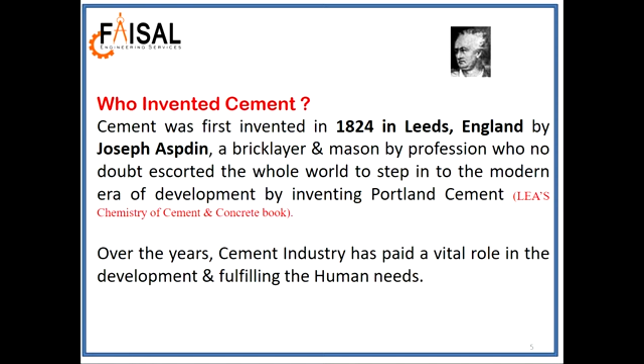This was the first patent certificate which was issued to Joseph Aspdin in 1824.

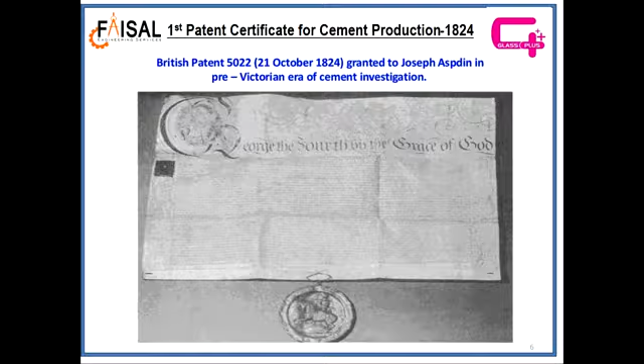Later on, his son William Aspdin developed and constructed this kiln, which is the world's oldest cement kiln. This kiln was operated during the period of 1847 to 1850.

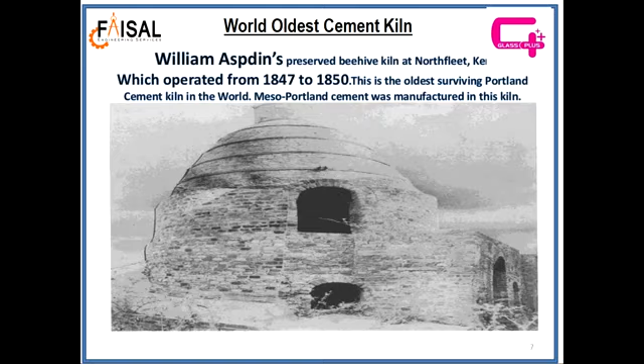Cement brought evolution in human shelter, from tents to concrete homes.

This is the data of yearly cement sales and its growth since 2006 till 2021.

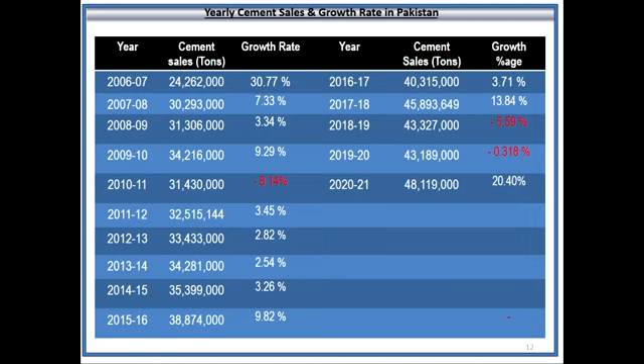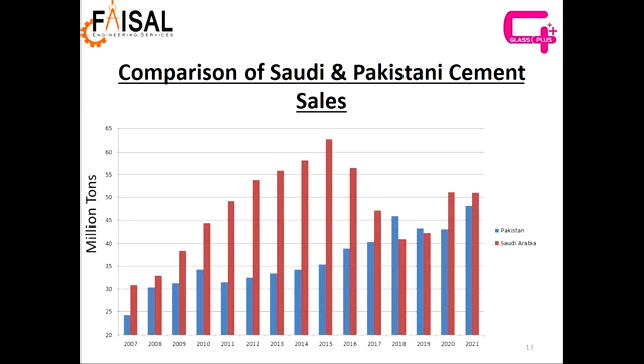This is a comparison of Saudi and Pakistani cement sales since 2007 till 2021. The data indicates that 2015 was the highest consumption of cement in Saudi Arabia, while in Pakistan the highest consumption was 2020-21.

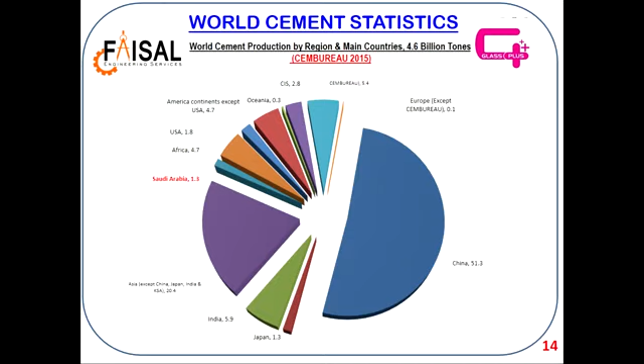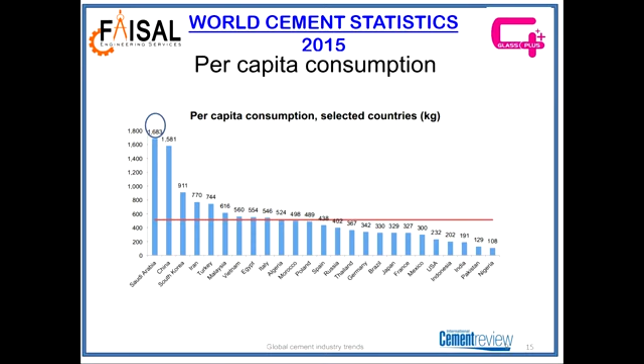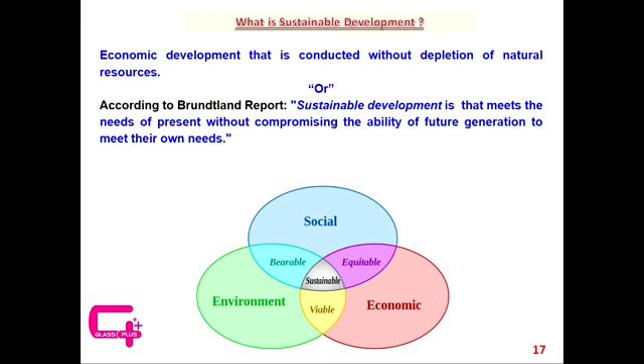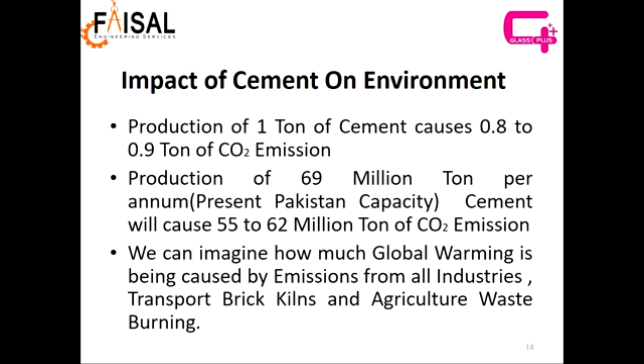We can imagine now how much global warming is being caused by emissions from all industries, transport, brick kilns, and agriculture waste burning. How to reduce this carbon dioxide emission?

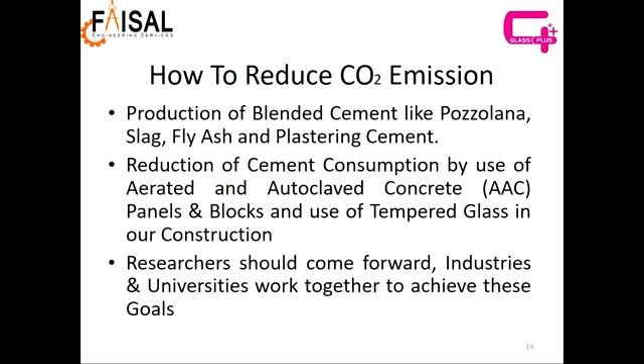Researchers should come forward. Industries and universities should work together to achieve these goals.

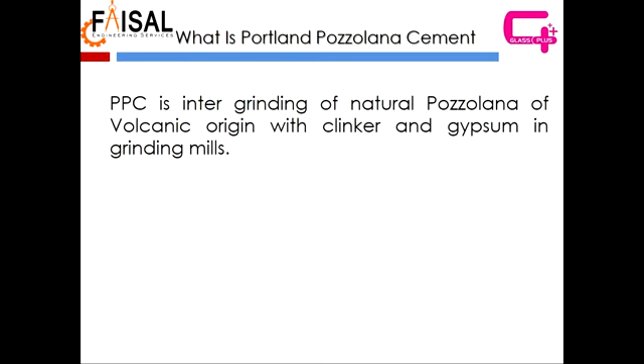What is pozzolana cement? PPC is intergrinding of natural pozzolana of volcanic origin with clinker and gypsum in grinding mills.

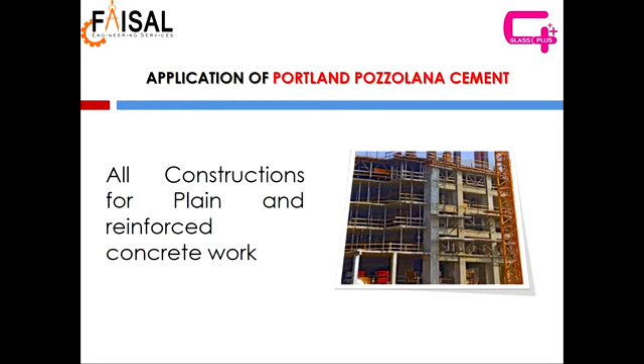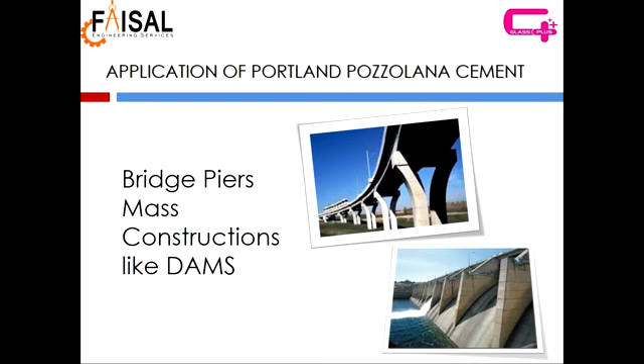What are the applications of pozzolana cement? All constructions for plain and reinforced concrete work, all marine concrete structures, docks, harbors, and jetties, bridge piers, and mass constructions like dams. What are the characteristics of pozzolana cement?

Low heat of hydration, thereby reducing cracking and extensibility in mass construction, freedom from segregation and less bleeding, water tightness is increased, workability is improved, and alkali silica reaction is inhibited.

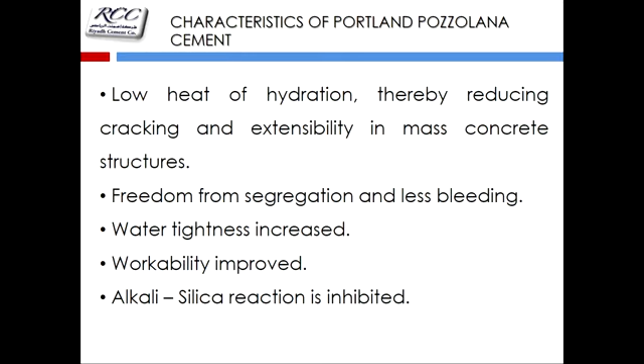Now we come to AAC, aerated and autoclaved concrete panels and blocks, and what are its applications.

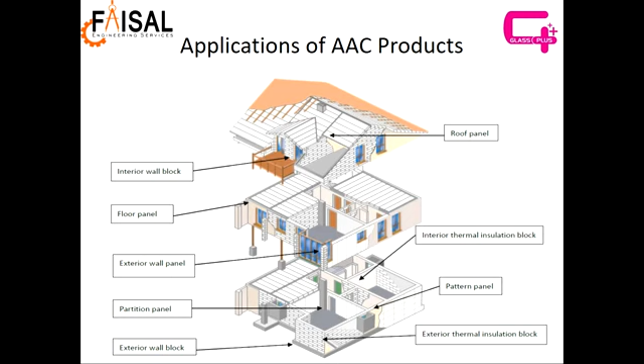These are the characteristics of aerated and autoclaved concrete: low in density, fire resistant up to 700 degrees centigrade, thermal insulation is improved, and durability is also improved.

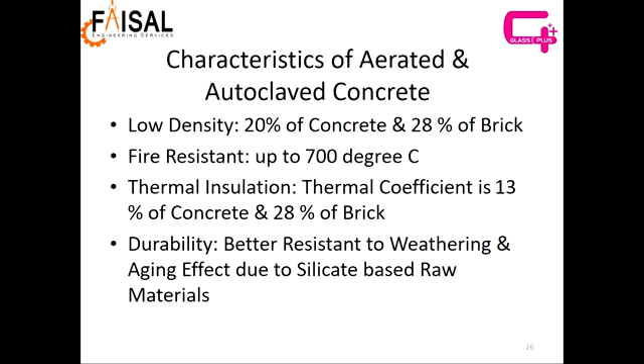Now we come to renewable energy. In order to achieve sustainable development, we should adopt and develop renewable energy resources like hydel, wind, and solar.

If we add 10,000 megawatt per annum of solar energy to our grid system, it will reduce 9 to 12 million tons of carbon dioxide emission. The payback period is 3 to 4 years, and the life of a solar panel is 20 to 25 years.

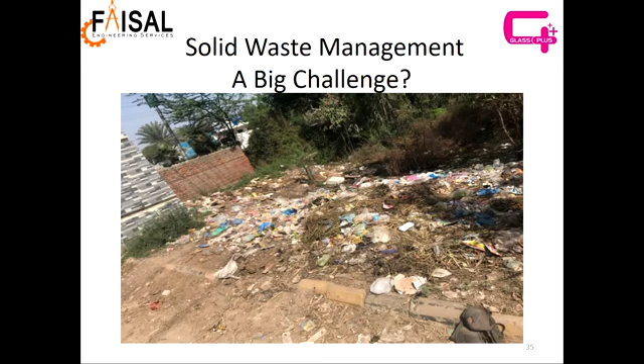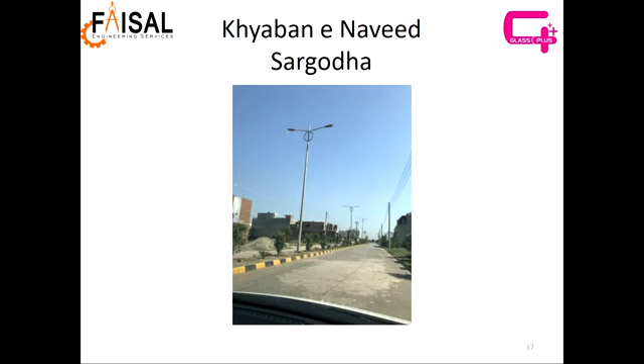Solid waste management is a big challenge in sustainable development. We should start from our home to make our home and its surrounding environment neat and clean by proper solid waste management, to dispatch all the waste to its proper place.

We should think every day, every hour, and every moment how much we have contributed to install solar systems on the roofs of our homes, schools, colleges, universities, offices, commercial buildings, and industries, to have effective utilization of this God-gifted and blessed source of solar energy.

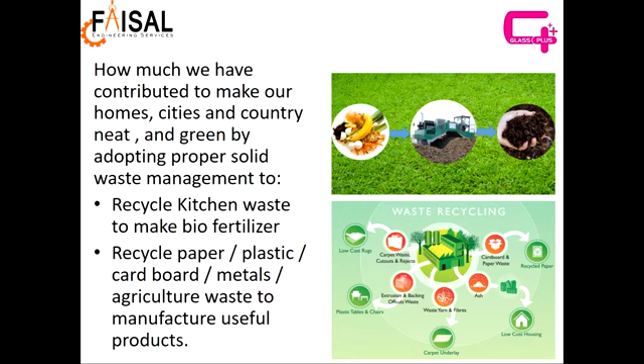How much have we contributed to make our homes, cities, and country neat and green by adopting proper solid waste management, to recycle kitchen waste to make biofertilizer, recycle paper, plastic, cardboard, metals, and agriculture waste to manufacture useful products, and use tires in the cement industry as alternate fuel to save our fuel cost, worth $1 billion.

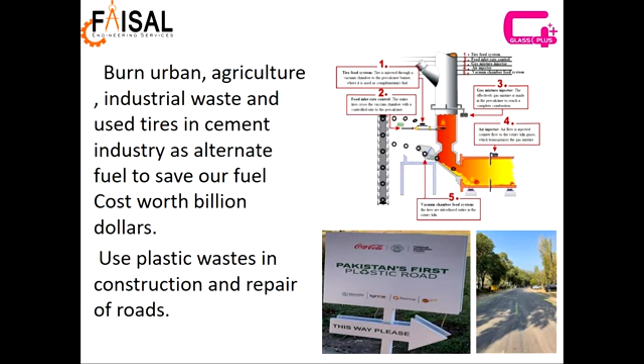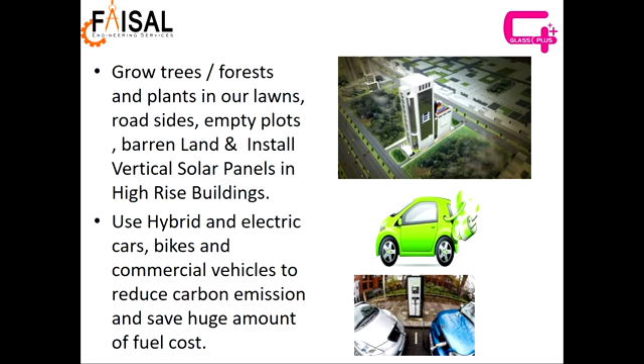Use plastic waste in construction and repair of roads, burn medical waste in incinerators for our own safety, grow trees, forests, and plants in our lawns, roadsides, empty plots, and barren land, and install vertical solar panels in high-rise buildings. Use hybrid and electric cars, bikes, and commercial vehicles to reduce carbon emission and save a huge amount of fuel cost.

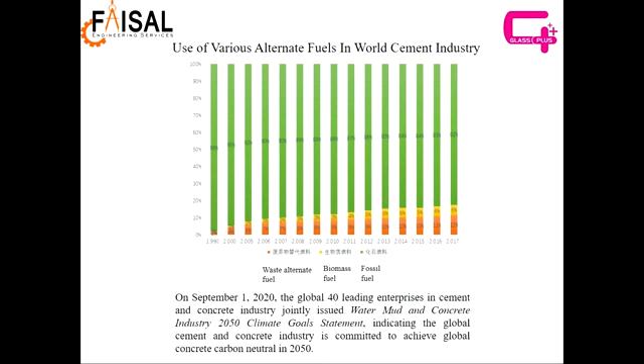Take home message for all of us: save this planet from global warming, make it clean, neat, green, and safe for ourselves, our families, our nation, our future generation, and all humanity.

I have made it my mission because, think deeply, remember the message from Allah subhanahu wa ta'ala in the Holy Quran, chapter number 45, verse number 13.

And I close today's discussion with the message from our Holy Prophet Hazrat Muhammad sallallahu alaihi wasallam: at-tahuru shatrul iman, safai nisf iman hai, cleanliness is half of the faith.